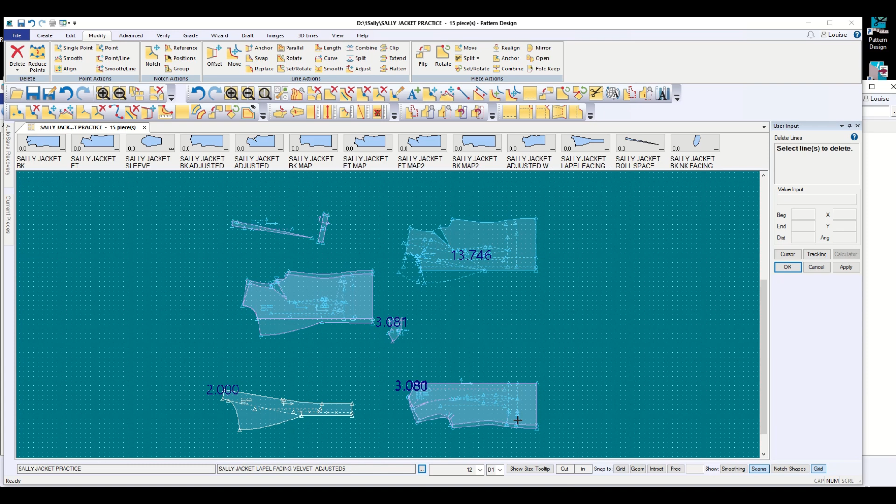Okay, so these are the pieces I'm mostly working with. I've got some of my extras, and I have lined up my back so that they're sitting on top of each other. I don't remember changing the shape of the side seam like that. But it looks like the mistake is in the piece underneath.

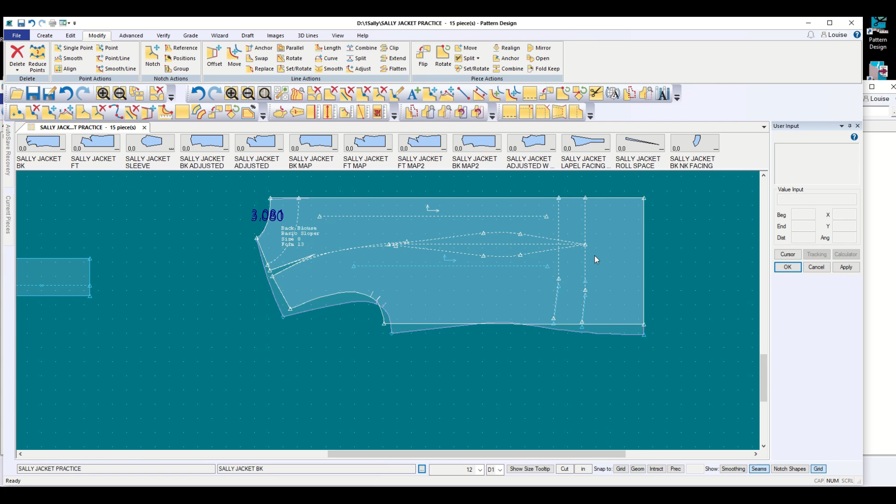So I want to copy the original shoulder shape right here onto my piece. So I've carefully lined it up so that it matches the way that it was sitting when it was first done. And I'm just going to copy this part of the line because when I'm making my lining I don't want to include the shoulder pad.

So create line copy, control, and I want this line. I also want the dart and the shoulder, and I want to put that on that piece and then say cancel, and it's there. So now when I move that, I've got the reference line for my original shoulder. And it isn't lining up quite exactly because of the ease that I've got and the redistribution of the three parts of the dart.

And then on the front, I'm going to do the same thing. Create line copy, this shoulder, put it on that piece, say OK, and I obviously didn't get it. Create line copy, this is the line, choose the piece that I want to have it. I guess I need to hold down the control key anyway. Okay. And there's the line and cancel. And I can move that piece out of the way.

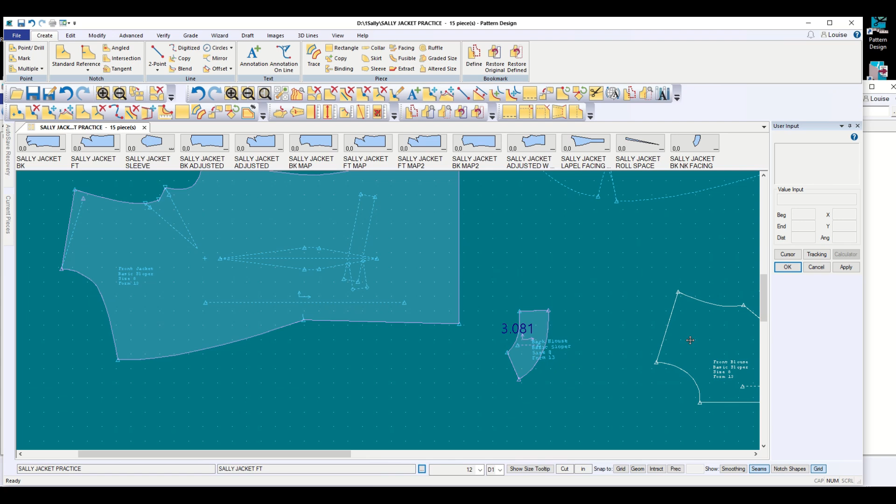So now I am just looking at my adjusted back, my back neck facing that came from the original. I've got my new front facing, and I've still got my map to work with and those two to refer to if I need to, because we still need to make our collar. But this one is about linings, so

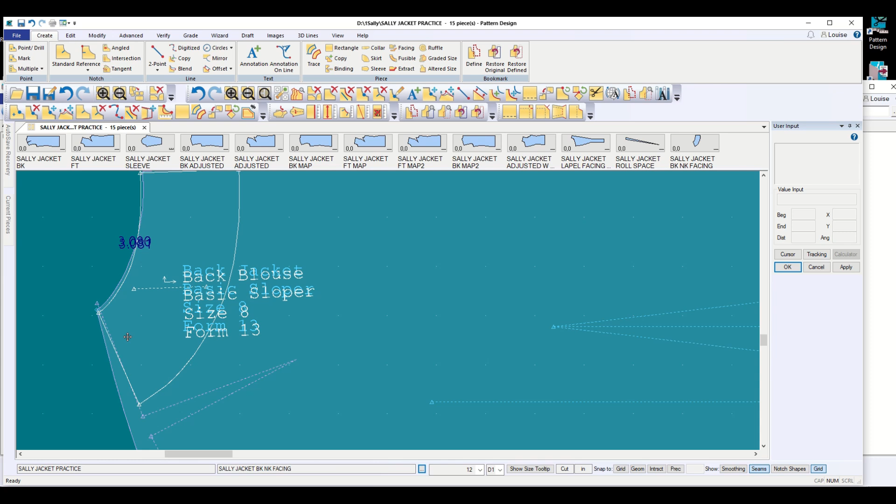I'm going to zoom in really tight and make sure that these two are on top of each other. If I got rid of that grade rule on the one underneath, it would be easier to make sure they were the same, but I'm pretty confident about that. Okay. So I've widened the shoulder area. I need to use my same piece, but I don't need the extra ease in the shoulder. And because of the way I'm going to make my lining, I'm going to put my dart in the curve.

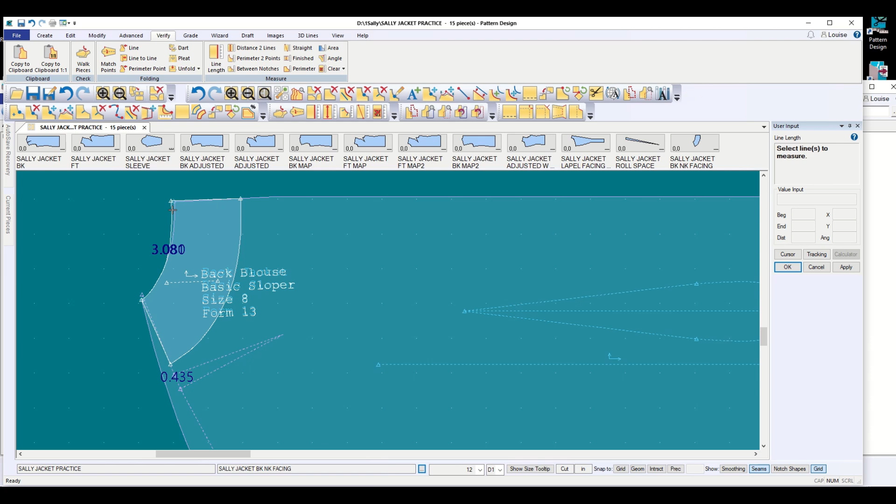So I need to measure the space of that dart and verify line length, this 0.435. And I'm going to go to my original back shape and my original shoulder shape. And when I make my back lining, I also want to have an extra inch added to it, tapered to nothing. So that's going to look something like this, where I just add this space and I come out here an extra inch, but I'm going to be more careful than that.

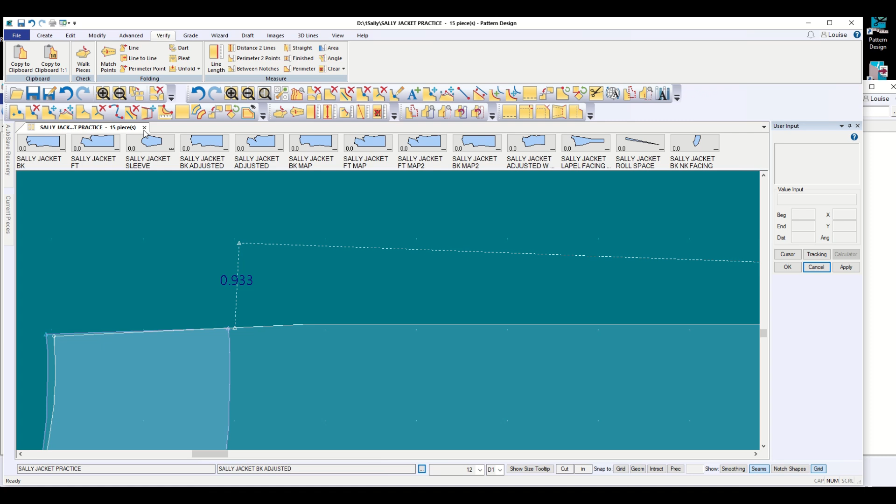And then this line is going to come clear out here, and we'll put a pleat down the center back that attaches to the facing. And I actually could be that relaxed about it. How big is that line? Verify. It's slightly less than an inch, so I would want to make it an actual inch. But that's where we're going. Okay.

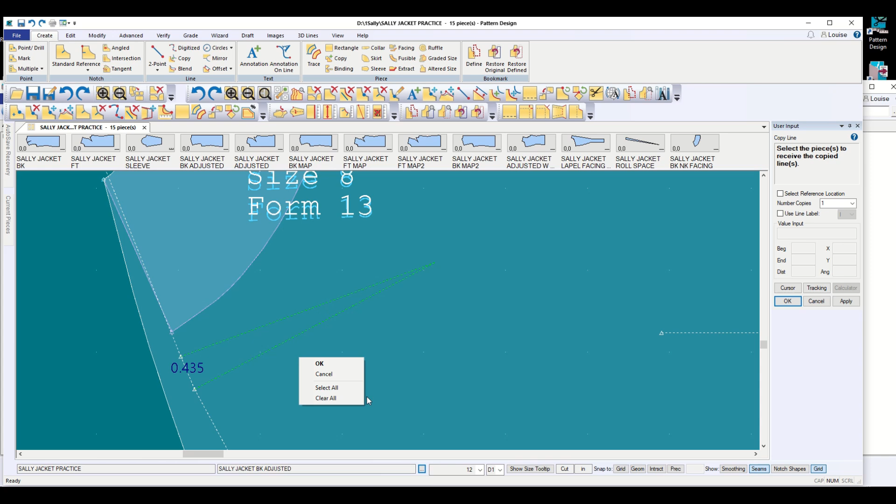So I'm tracing off all of this. I'm using my original shoulder line, but I want to move my dart over. So I'm going to copy this line. And it says to select the piece to receive the line, and I've made a mess of it. Create line copy again. Select the piece that's getting it. Well, wow. I guess I could just put it on itself, because I really just want to line it up exactly right there. But it disappeared.

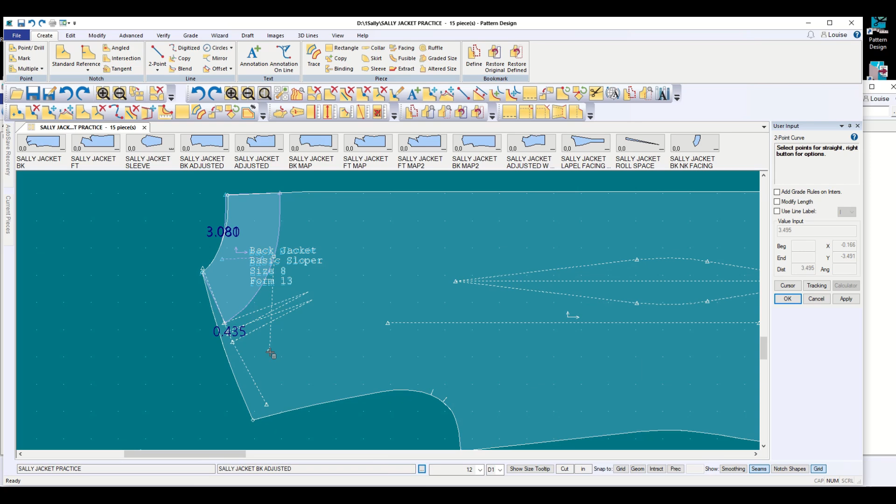Let me make sure that I actually got the right end. Yeah, that's very close. I might need to blend it a little bit. It might end up having a little bit of ease in there, but we're adding that inch out this direction, so that's going to be okay. And I'm going to create a 2-point line right here, and I'm going to make it horizontal.

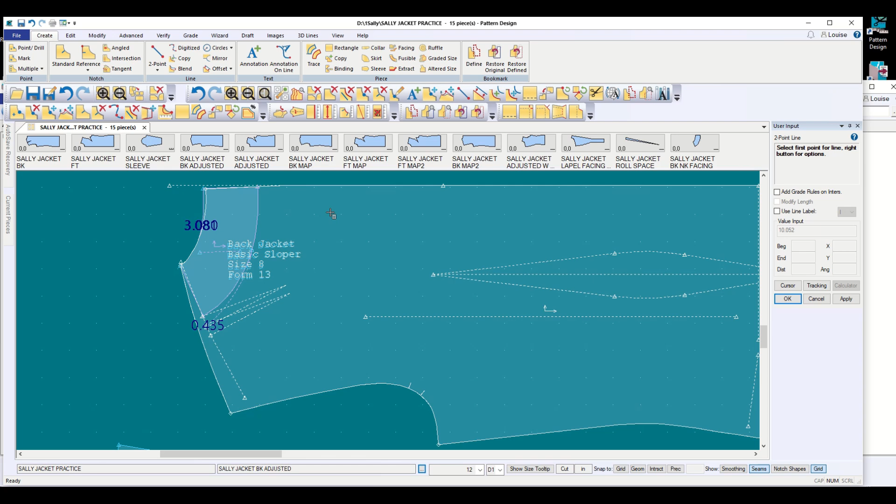And then I'm going to offset that line so that I know I get my inch. Create line offset. There are other ways to do this. I know I do some strange things, but I also do some good things. Okay, so I've got that line, and I want to use that part of it, and I want to extend this line.

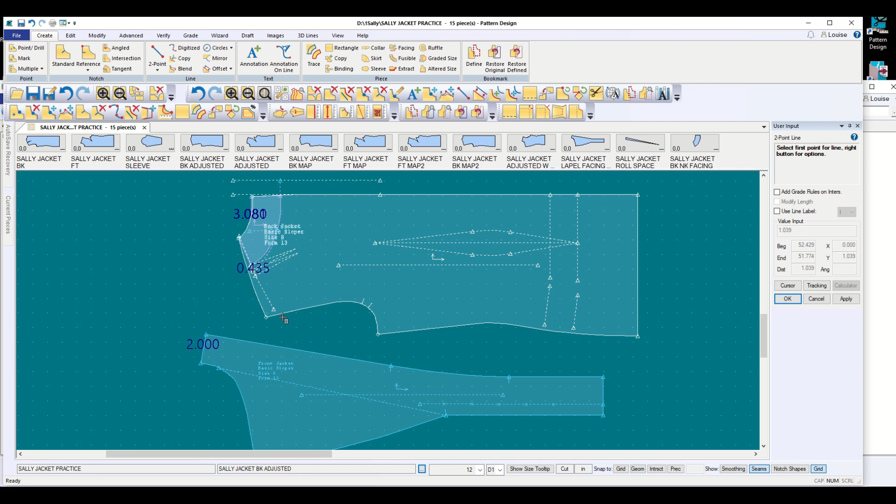I'm going to make a 2-point line that joins this one, that moves vertically just right there. So that gives me the information I need to trace off this piece. And that's going to disappear. And do I want to extend that line out? Sometimes you want to extend them out, but sometimes if you continue on that trajectory, they get too big.

So I'm going to extend this down and make a new line. So 2-point vertical, end it right here, and then I'm going to create a straight line that goes from here to here, because I'm connecting with the end of that and I'm coming straight out here,

and that's the line I'm going to end up using because this is going to sew to that, and it will be minus the dart, and that dart's going to be controlled anyway, and it's going to be on the inside, so the dart is there. It's just more of a princess line than the other line.

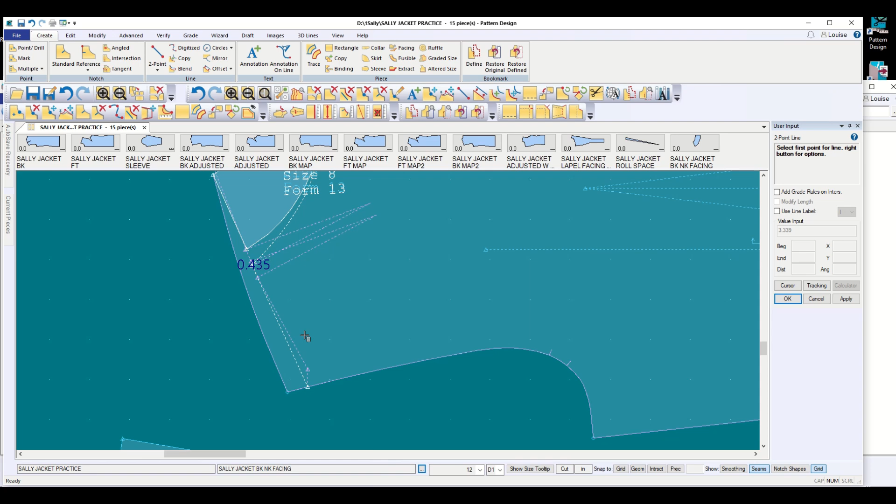And if you don't end up doing this identical to the way I do, I just want you to remember the concept. And on your jackets, maybe you're going to use a princess line instead, but we've studied that. I'm just going over how to make a lining and where to put things. So from here, now I need another new line. And if I haven't explained it well enough, you'll see it at the end. So maybe you just want to watch until I get to the end.

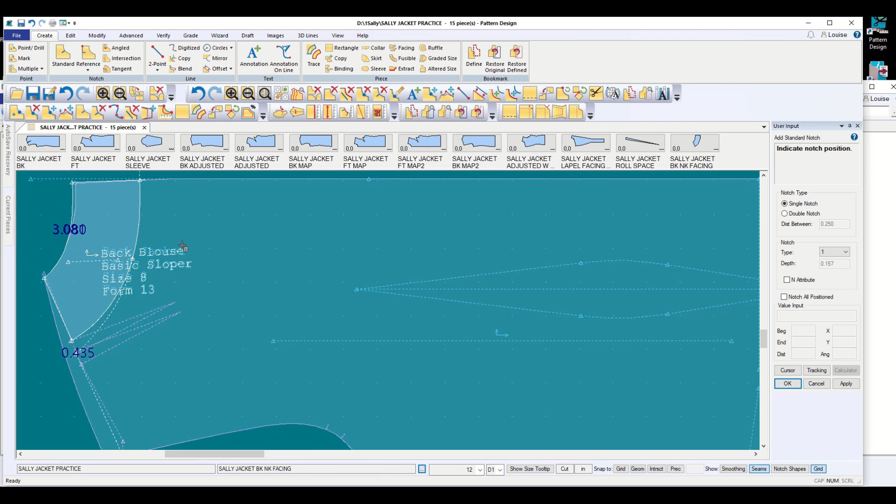Okay, so we have our back neck facing, that's a control piece. Our back neck facing is going to sew to our lining piece. Our lining piece needs to have a notch right here, so I'm going to put a notch on the end of that line right here. And then I'm going to trace off my back lining. Create piece trace, control this line, this curved line, till it joins this line, and then this line.

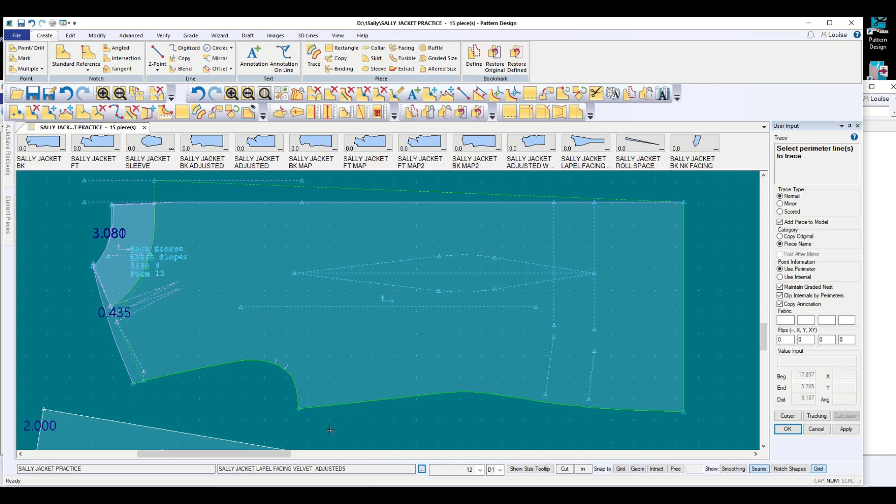Okay, and then do I want my darts? I don't know that I do, but I'm going to copy them. And you know, really, I'm going to want them on the straight of grain, so maybe copying them isn't the right approach. Okay, so that combined with the facing is my back lining, and I'm going to call that my jacket lining adjusted.

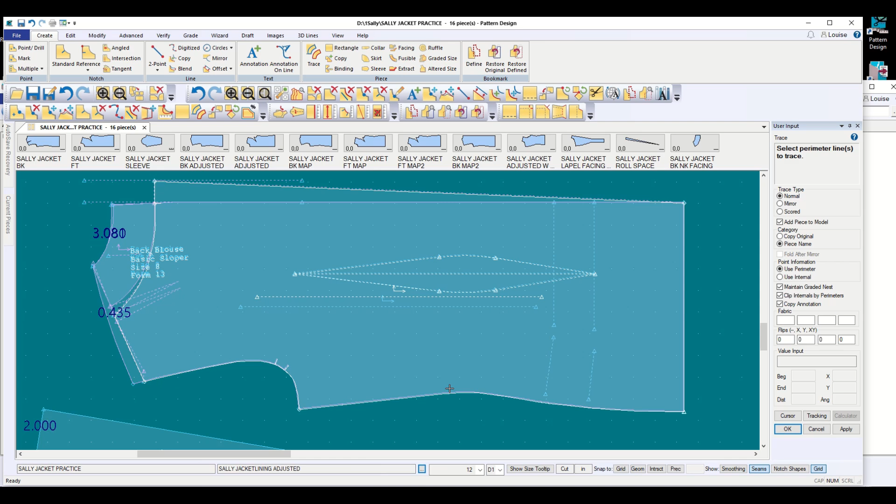Okay, so this was just my helper lines. I don't need those attached to my facing anymore, but I'll leave them there for a minute. So this is my actual back body that's going to be the wool that matches, and it's got the dart in the right place. If I'm going to add a dart to it, I could make it boxier by leaving the dart out. If I did that, I'd want to leave the dart out of my lining. So you've got a lot of design choices to make in addition to the choices I just made.

But what you're going to do first with this is this one is going to be cut on the fold. So we'll want to rotate this group of lines so that it's parallel to that, so that if we were to sew a dart in, it wouldn't be crooked.

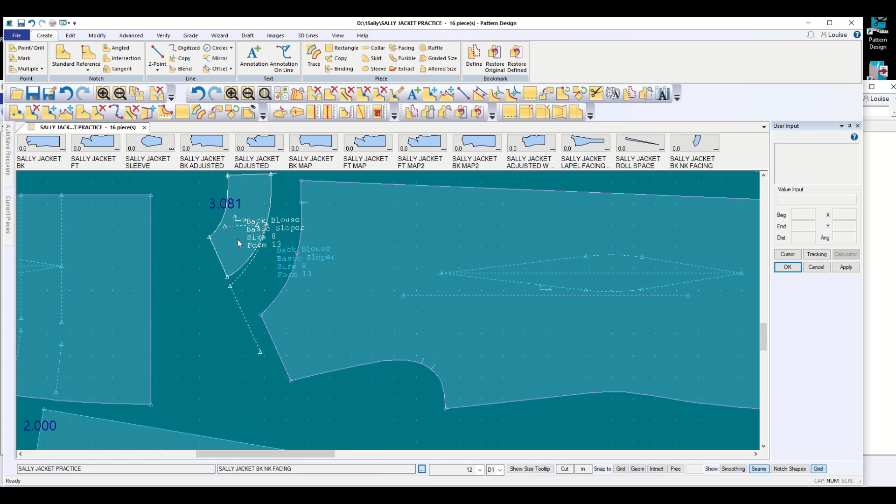And then when the lining pieces are sewn to each other in the shoulder, and the body pieces are sewn to each other, and the facing pieces are sewn to each other, so you'll have this piece sewn to this piece in the shoulder, and you'll have the front lining that we haven't done yet sewn in the shoulder. So the lining pieces will end up being sewn to the facing pieces by stitching them up around the neck and back down, all in one shot.

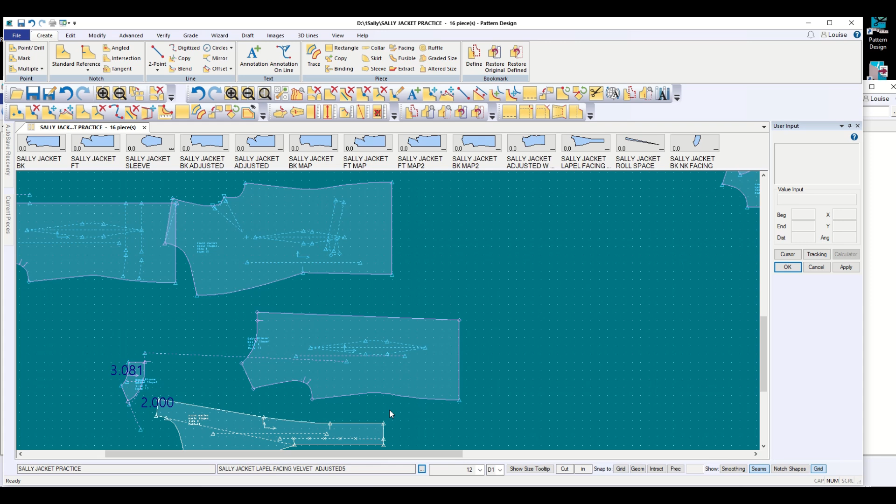And if you make it that way, if you want to make a zip out lining, that makes it a lot easier to convert it to that. And there's a sample in the classroom, or you can just imagine a zip out lining. But this is going to be on the fold, and then you'll put a tuck right here, and when that sews together minus the tuck, how close is that going to be to what we need it to be?

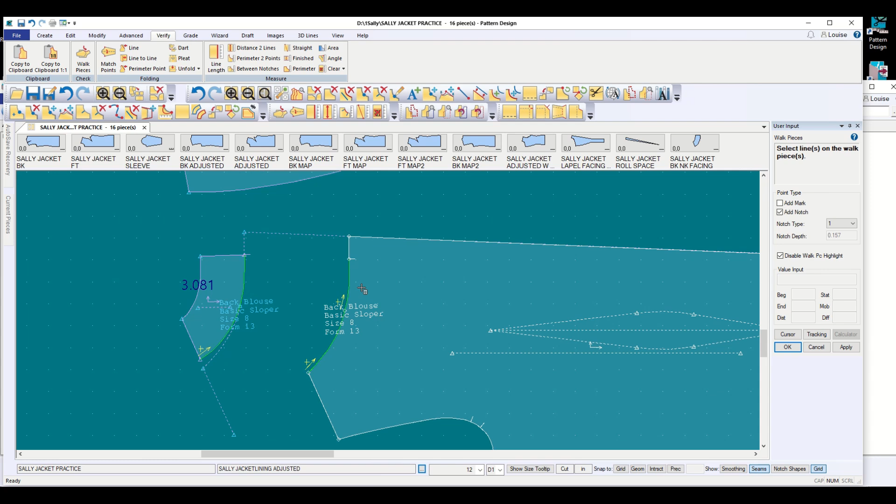Verify walk pieces. The stationary piece is this one, and I want to switch direction, and I wasn't holding the control key, so of course. Walk pieces. Select lines on the stationary piece. This one, change direction. Release the control key. Select the line on the walk piece. Hold the control key and choose the line, and I don't need to get the last one because it's not going into that line.

And so that means I need to ease in how much in that space, which I probably should because it would make it fit better. So I'm going to leave that alone, but I'm going to measure it because I'm curious. Create line.

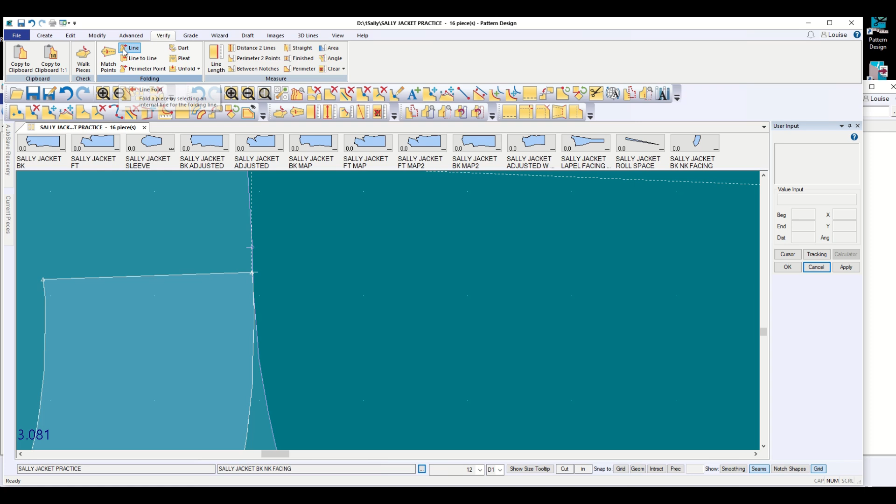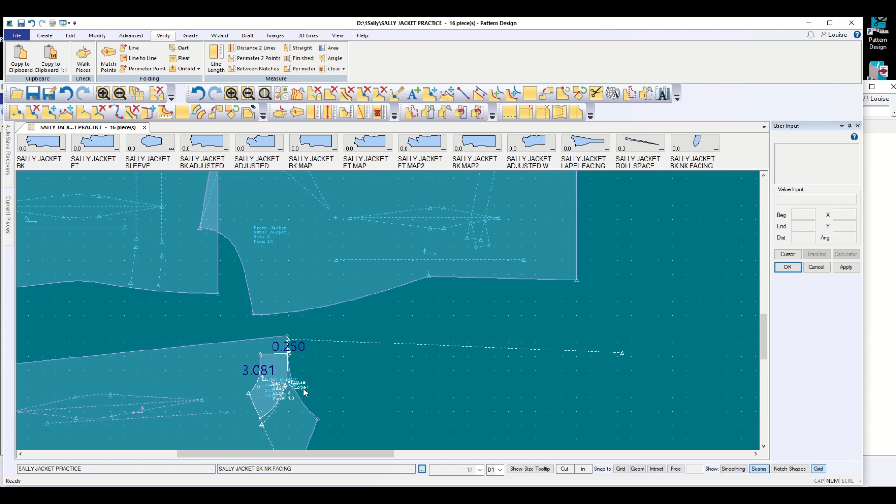That's 1/4 of an inch, which is what it looks like. And I believe that we can ease that 1/4 of an inch there. The problem is when you get a sewer that thinks they know what they're doing and the pattern maker has built ease into there on purpose. So we'll ease the lining into the neck facing, and then we'll have this extra tuck back here that will just fold over into a pleat that goes down the center back, and you'll see that in the sample, and most coats have that.

So that means I'm not going to change the start, but well, okay, I'll change it. First, let's create a rectangle. And I'm feeling bad because I don't think I've made it clear enough before I started what we're doing, and here we are doing it. Modify, set, rotate.

So even though that's going to be a little weird on the piece, it's necessary because it's going to be cut on the fold. So now we need to realign the grain so that it's parallel to the center back. So now that's where it needs to be. And we can either leave the dart where it is at the bottom or leave the dart where it is at the top. I'm going to leave it where it is at the bottom because it's the back.

So I'm going to modify, line rotate, and I'm going to hold down the control key, and I'm going to choose all of those lines so they function as a unit, and then release. And then it says to select a point on the line to rotate around and a point to guide the movement. So I'm going to move them all so they're parallel, and I've got them lined up on the dots. So if I wanted to, I could arrange it so that it's right on the dots.

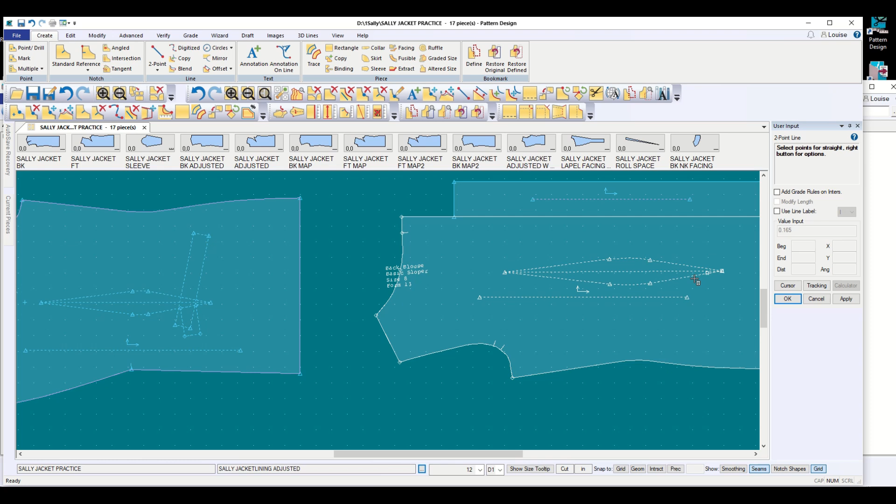Or better still, I could create a 2-point line and start down here and horizontal. So I'm not quite perfect with that, but if I had done that before I started, then I could have rotated this precisely to that line, and then I would have had it right on grain and made it easy to sew as a dart. So I'm going to save that piece.

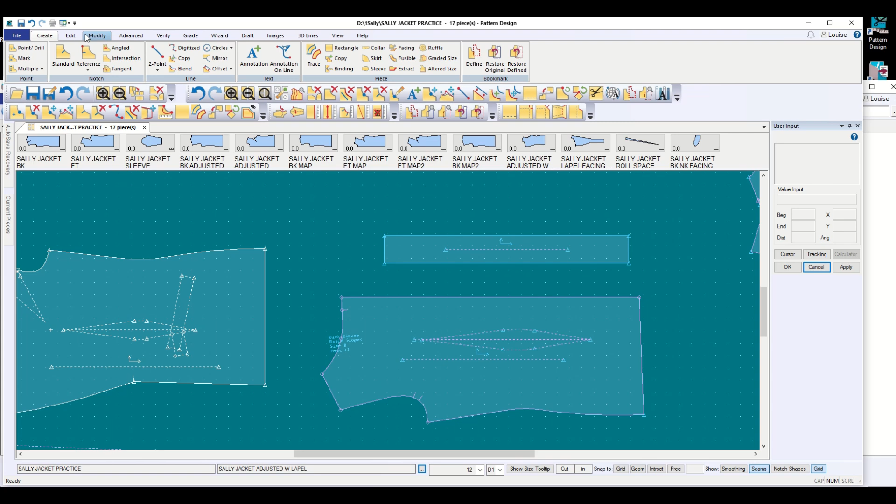And I've got this one the way I want it now, so I don't need those helper lines on it. And I think that I haven't changed it actually, so I don't need to do anything with it. It's just already there. So we have our front and our back lining and our back and our back neck facing. So I'm not going to save that. It would be safer if I deleted it. And I want to get rid of all those numbers, so verify clear.

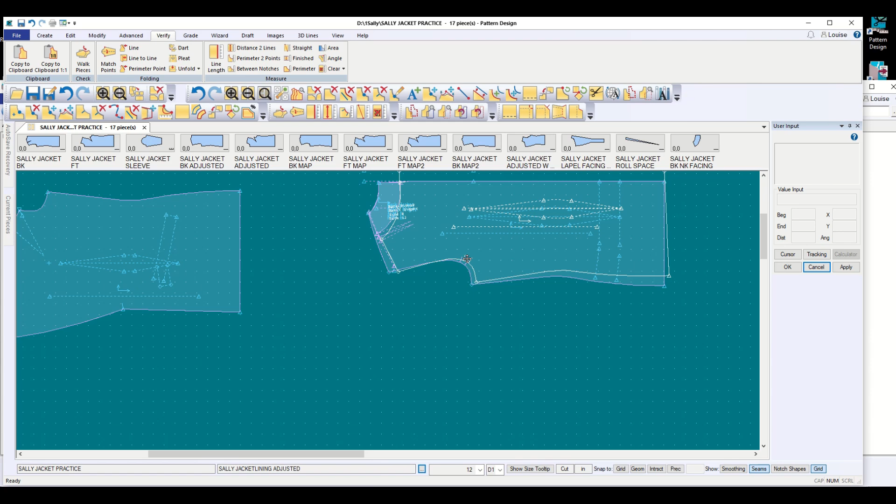So my back neck facing and my back lining, they're crooked because they're not on the same grain anymore. And where did I put my front neck facing? Well, I've got another one, so I'll bring that one down. Oh, there it is. Wow, here's where I want to put all of my pieces. I could separate them all. Don't really want to do that. I'm going to zoom in to right here. Oh, I'm going to touch those two corners. And if I had done it in the right order, that would have been great. So we'll try that again.

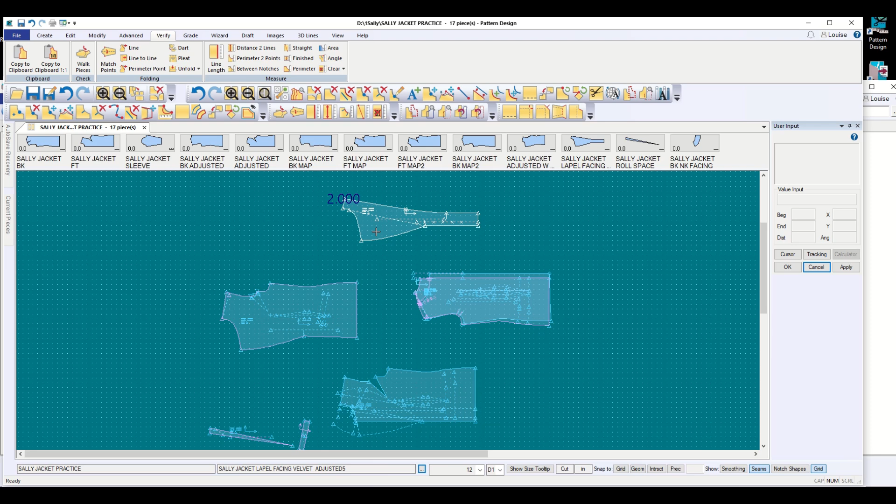I want on the screen, I'm going to choose the zoom tool and outline the ones I want to see. And those are the ones I want to see. So I've got my back body, my back lining, and my back facing, and I've got my front body, and I need a front lining, and I'm going to compare my front facing to my back facing. Modify piece flip around that line, and if I line those up, they should come together.

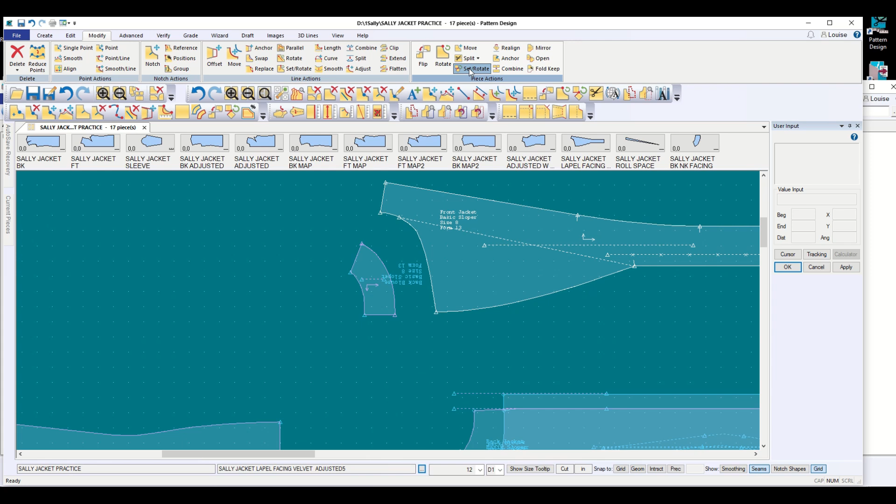They were never on the same shoulder. The front and back shoulder weren't aligned perfectly. So, when I cleared the measurements, this wasn't on the screen, so I imagine that has something to do with it. Verify clear. Okay. Modify, set, rotate. I'm lining up my back neck facing on my front neck facing to make sure it matches.

And there it is. So they line up correctly, and if I flip around that line, modify piece flip, flip about line and I choose that one, they have a nice smooth line that when the shoulder seams are sewn together on both sides, then we're going to create the front lining to sew up to that neatly, and the back lining will sew over there, and then we can make our collar. And I think I'm going to do the sleeve linings at the same time that I do the sleeve. Okay.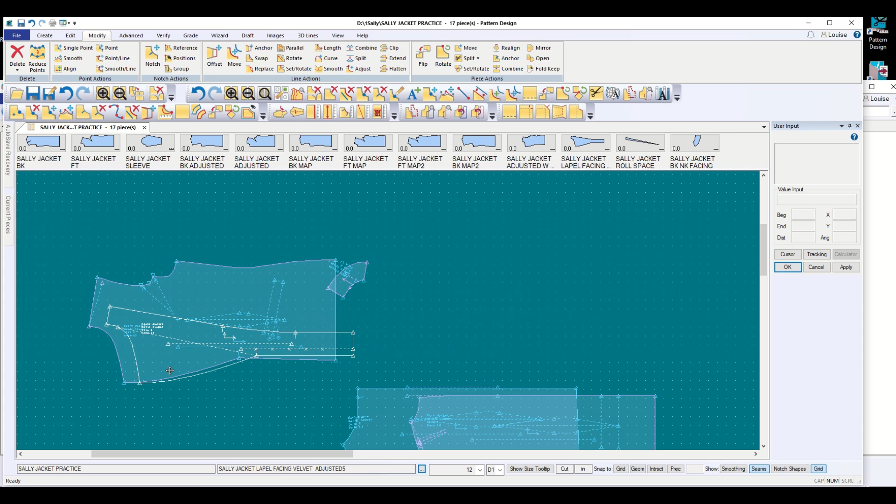Well, I made it difficult on myself, didn't I? Because if I had made my lining when all of these pieces were lined up exactly where they go, I wouldn't have to put them back where they belong. Okay, so I'm going to line that up until one disappears, whoops, inside the other. Okay, so they are supposed to align right there, and they appear to be aligning right here.

So I'm going to copy this line onto my front, create line copy, select this line, control, all three of those lines. I need to combine them into one. Okay. I did that again. I keep saying okay. Create line copy, control key, choose the lines, release, select the piece to receive the lines, cancel, and cancel again.

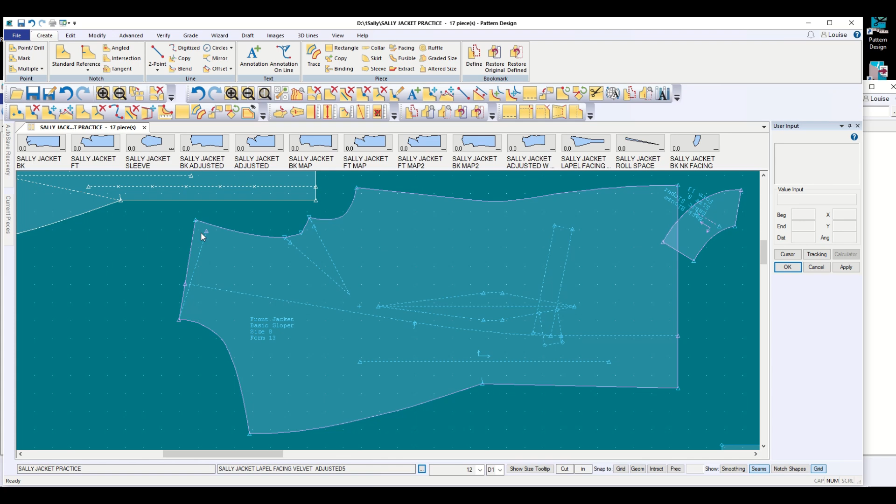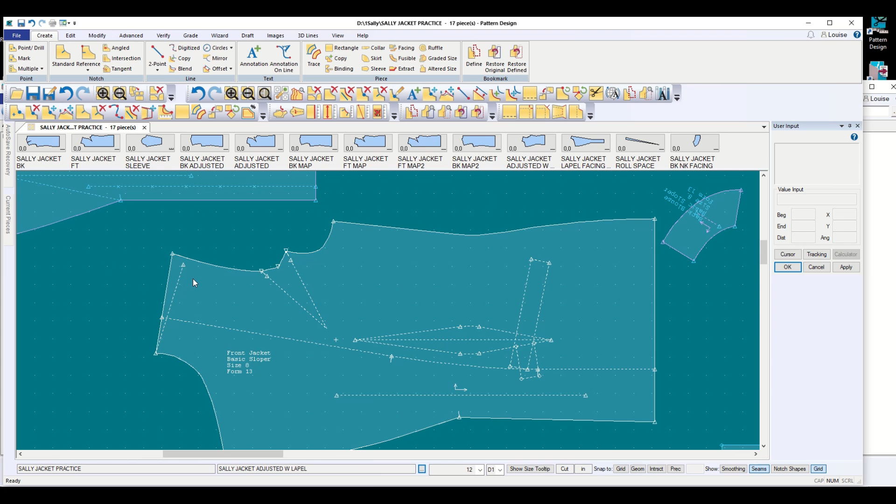Okay, so I can now trace off my lining piece over here. And I need to keep this dart. This one I don't necessarily have to keep. But if I do the same thing I did on the other one, instead of following the trajectory, I move this straight out and draw a different line. I don't know which one would be the right answer. It depends on what I did and how I did it. So I think based on what I did over here, I want to come over here straight.

So 2-point line, right click, vertical, zoom in, connect with that line. And then I won't get this big huge amount right here. So I'm going to draw a new line from here to here, which is where I want it to be. And then I'm going to delete the other line. And I think that's more correct. But that's something you have to figure out based on what you're doing.

We're getting into a lot more complicated, and I'm not just simplifying it for you. Let me know if you want me to just simplify it for you, and I won't add things like roll ease or anything. I'll just do the simple one that won't fit as well. Okay, so I'll start simple and then I'll get more difficult with this one. Create piece trace, hold the control key. I want this line. Uh-oh.

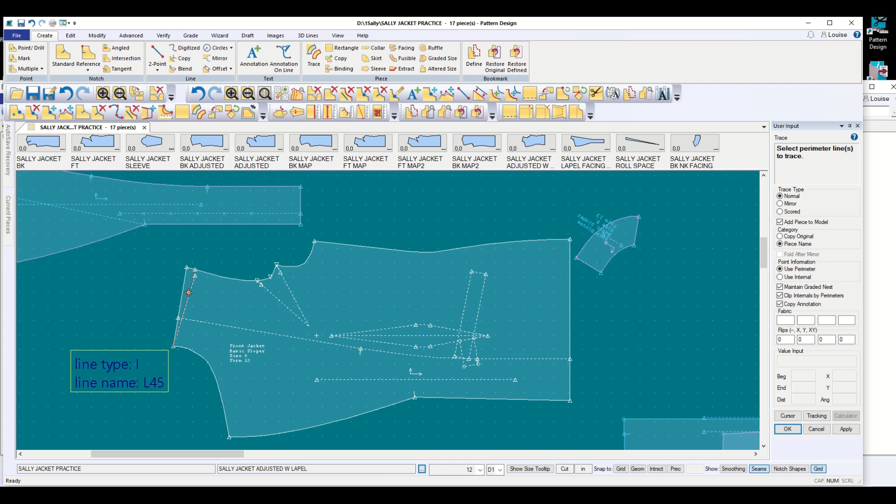Well, my facing is going underneath and my body is on top. So it makes sense that I want this little corner of my facing cut off when I trace this off, because it's underneath the shoulder pad. So I'm going to keep going. But that means we'll have to come back and double check the shoulder because that's changing it a little bit.

When I made the shoulder facing, all right, I'll finish the thought and then release and hold down the control key, and I want all of these lines on my lining. And release. Okay, so there's my simple version of my lining, and it sews to my facing. And this is my adjusted front lining. Okay. Cancel.

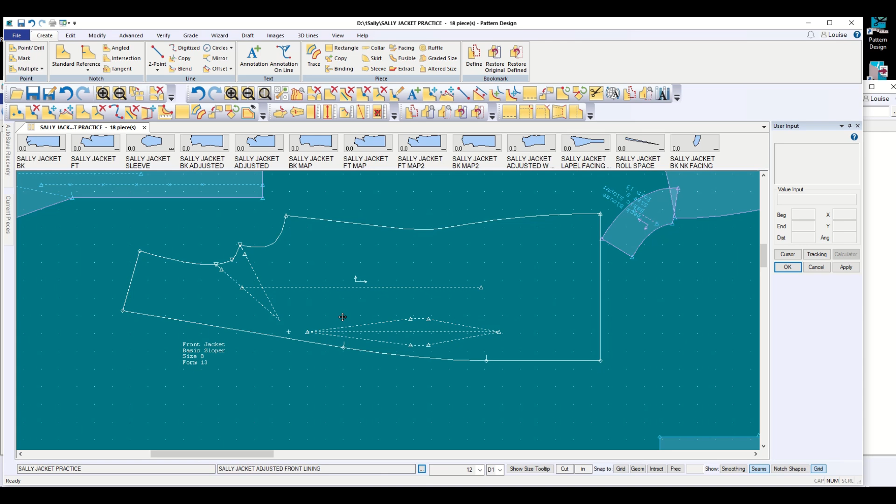So what we've got right now, when I made this back neck facing, I went back to the original to make it, and I didn't do that when I made this piece. So it makes sense to me that this piece probably did need that little adjustment. So right here, the neckline is the same, but if this is going to sit underneath that shoulder pad, this does not need that extra shoulder pad ease. So I'm going to line that up exactly on top.

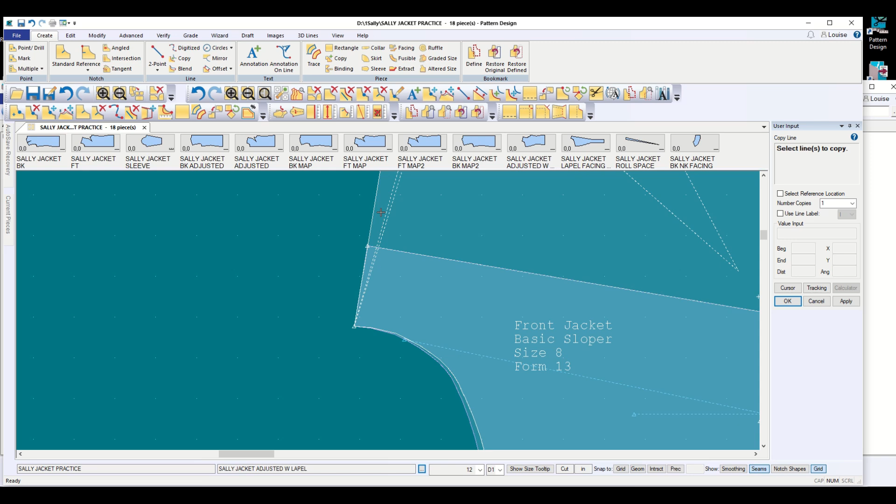And then I'm going to copy this line onto this piece because I'm probably going to chop that off. But that means I'm going to lose my right angle, and I'll have to make some adjustments to the facing with the back neck facing. Create line copy. I'm copying this line. I'm putting it on this piece, and I'll cancel so it stays where it is. And we'll take it from there. So this little bit probably needs to be cut off for the same reason that I started from my original back shoulder when I made my back neck facing.

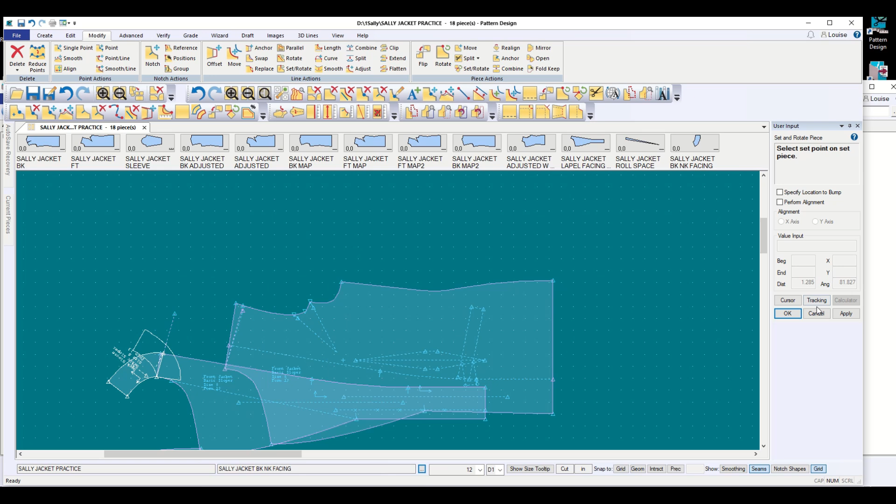So how well do these line up if I line it up on that line? Modify, set, rotate on to this line with this line. Cancel. Well, I lucked out. That looks fine. So I can just swap that. So if you've always wondered how you know how to make the lining smaller than the body, you don't add shoulder pad ease to the lining. Okay.

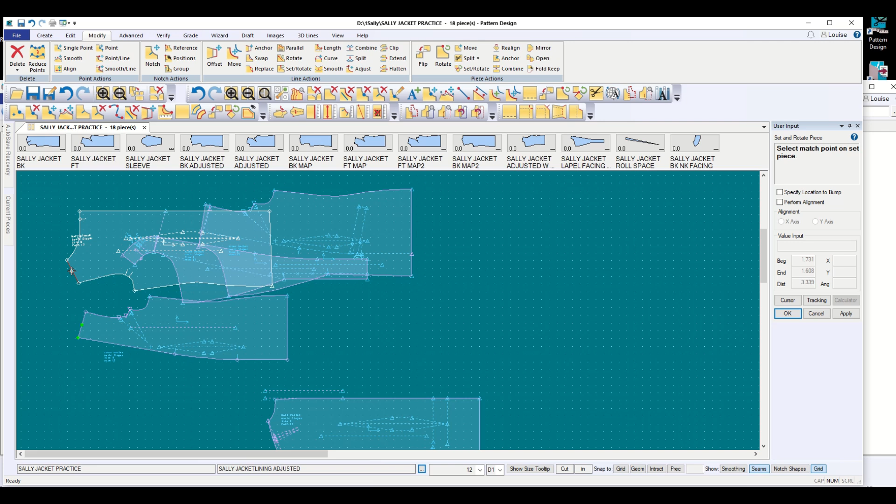And where's our back lining? So I'm going to flip that over and join it. Modify, set, rotate. So this is joining here, and this is joining here. Cancel. Oh. So we have a little discrepancy here. So it makes us wonder what I did. Because we deliberately left that there, and if I backtrack, maybe I should have it here, but I don't want to add that extra ease back that I took out where I put the dart in there, but the shoulder was a little too wide.

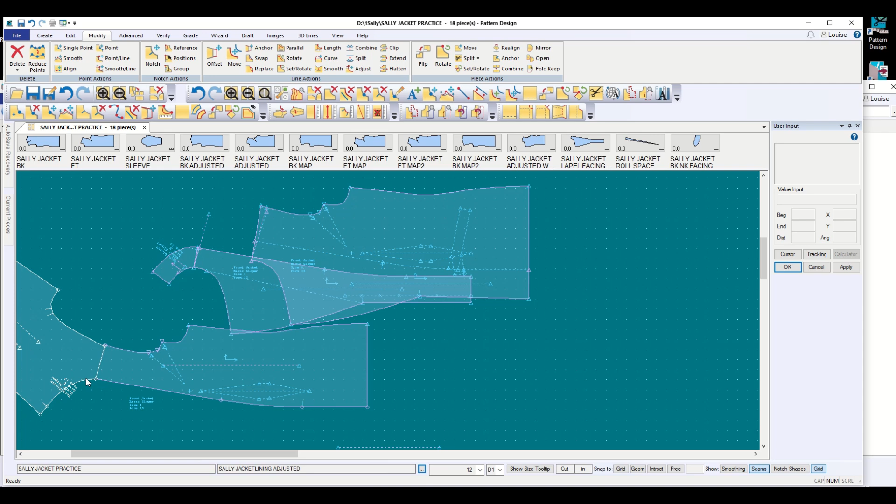No, it was this length that was a little too wide, so that's concerning. I need to backtrack and figure out what I did, but you don't have to listen to that. So this is going to sew right there, and this is going to sew right there. And you'll just stitch all the way up right here and combine them together. And I'll be more careful about that. So it's lining up on that inside line.

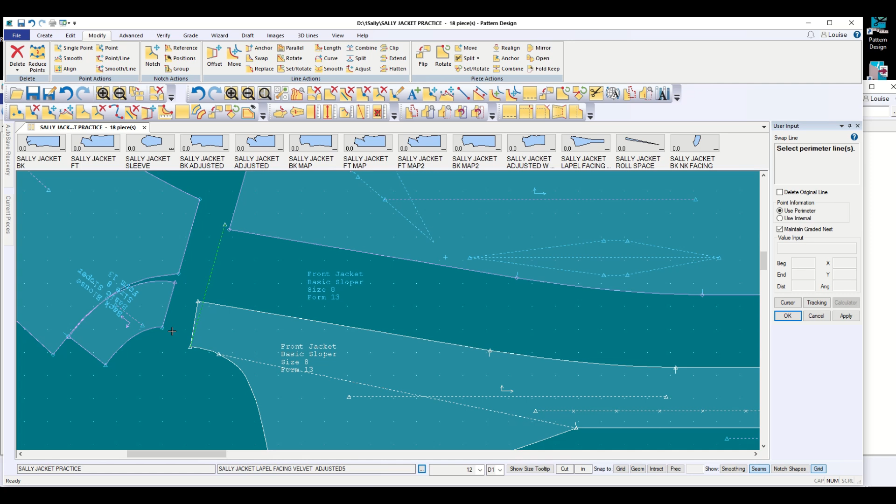And then this piece, yeah, I'm not really liking that. But so I need to swap those two. Modify line swap. So those come together nicely now. And those come together nicely with it. So we just need to set rotate this one.

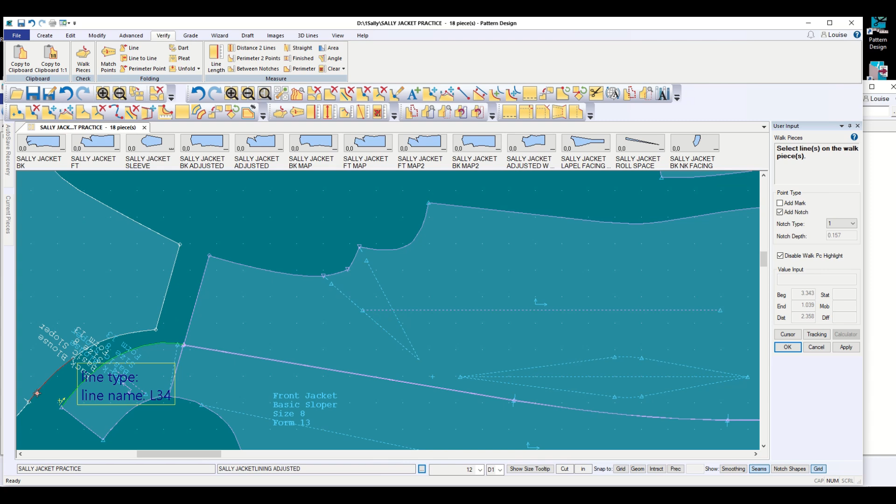Well, what did I do? Verify, walk. From here and here. Well, I didn't hold down the control key, and so I couldn't flip it. Verify walk. Stationary. Release. Control again. Walk piece. Change direction. Come on. I must have touched it.

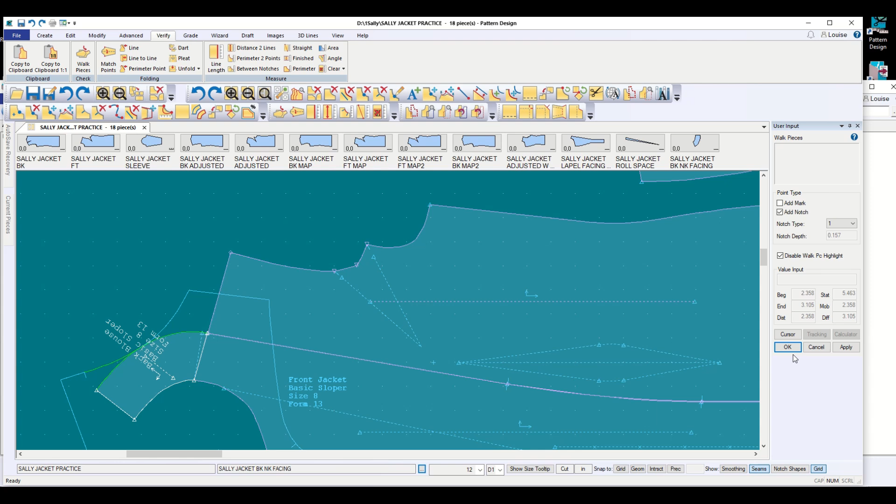What do you suppose disable walk piece highlight means? That hasn't ever been there before. All right. We'll try that one more time. But really what I want to do is walk it along that way, not flipped. But if I do that, then I'm going to end up with this right here, and I'm going to just rotate the piece, because if I ease that in like I want to, it will fit better.

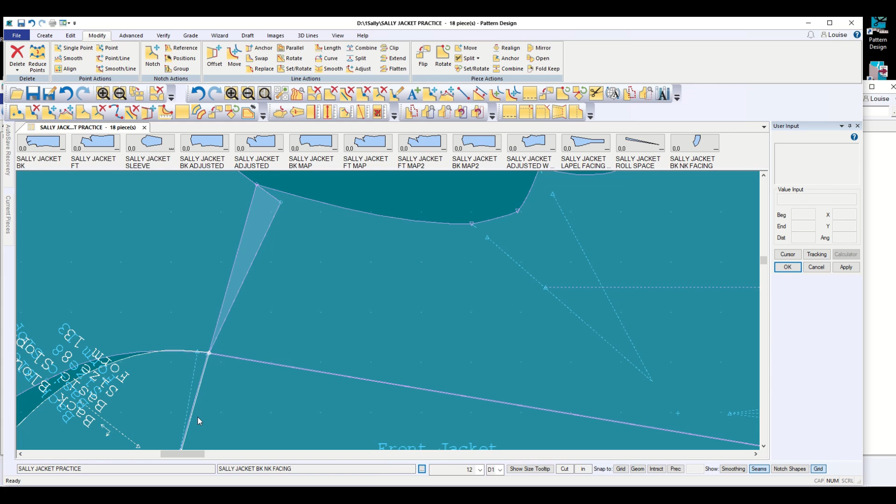So modify piece, rotate, select piece to rotate, the point on the piece to rotate around, choose a reference point. So if I line that up on my back, well, that's not pretty. Those don't come together nice and straight like I want them. So if I was working with that on the table, I would draw a straight line right there and put it back, which is essentially going to add to my back piece what I cut off the front. This is what happens when I'm thinking and talking at the same time.

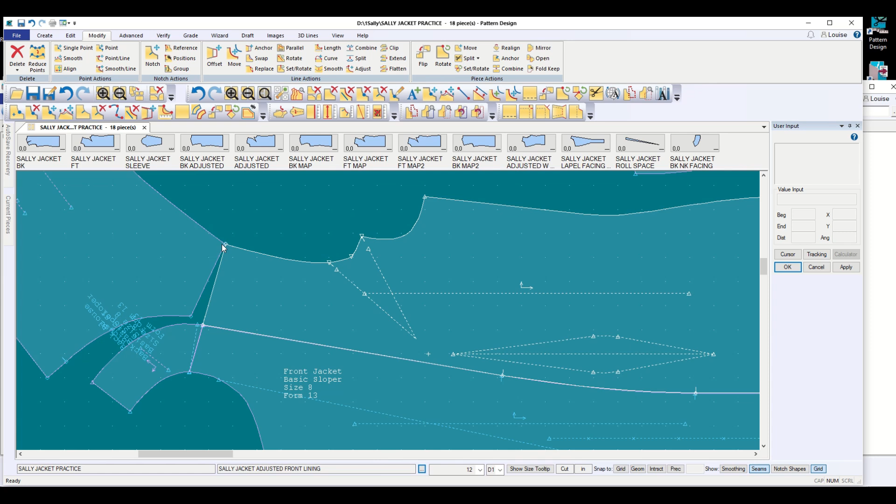Okay, we're going to go back to trying to walk it just for fun. Maybe I don't want to put the dart into that space. Sometimes I wonder if that's a good idea. It's convenient because you don't have to sew an extra dart, but it causes all kinds of problems, and I wonder if there are fit problems too. But it is a way to compensate. Okay. So I think that if I line this up right here, modify, set, rotate. Right now I'm thinking out loud and making all kinds of lovely mistakes.

So right here, where I was trying to put this dart in, I like putting the dart there, and you can actually see, because of the shape of the curve change, we had just less than a half of an inch of dart that I was putting there, and rotating it in and easing it is putting it there. But our shoulder still needs to be the same, and I don't like the way that joins. So I'm going to move that blend, and it's going to kind of be splitting the difference between putting the dart in the shoulder, and it will keep our angles turning out nicely without changing the fit.

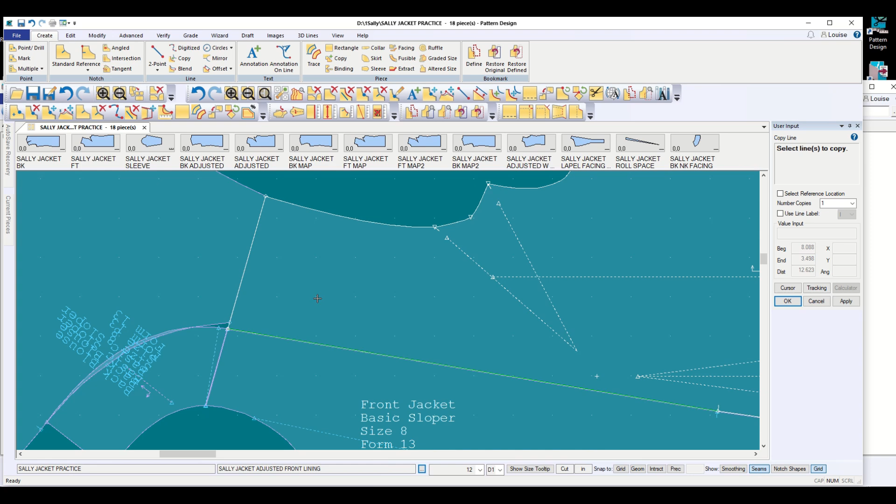So I'm going to create line copy, and I'm going to copy, no, not piece. Okay, create line copy. I only want to copy this line. I have to select the control key, copying that line, and I'm releasing and putting it back down again. I want it to go on that piece, and I want to cancel and say okay. Alright, I realize that I just skipped a whole bunch of steps in my head, and I'm sorry if that lost you, but here we are back again.

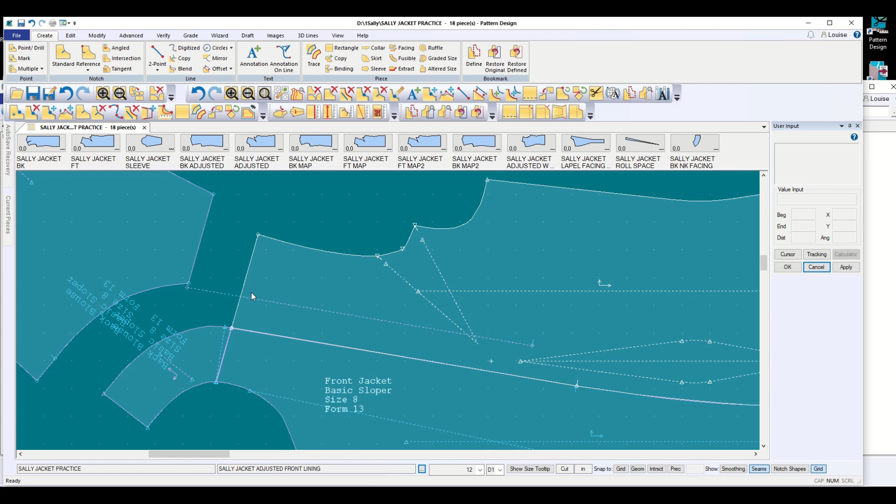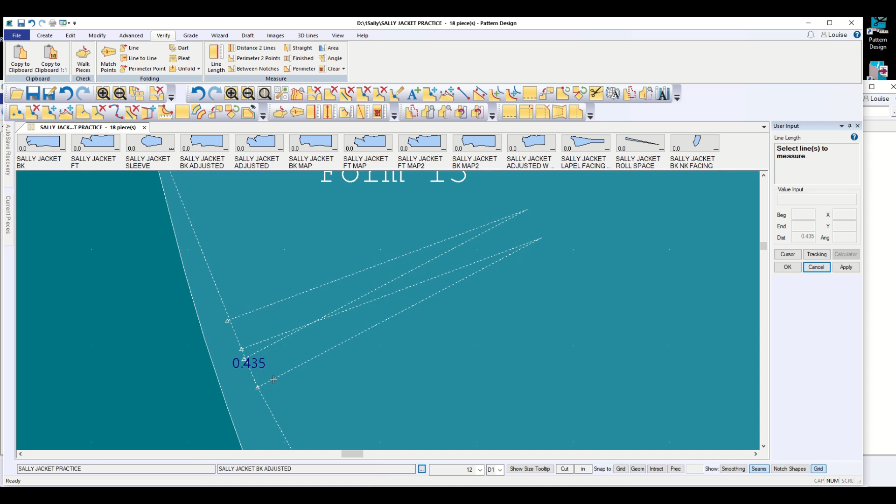I copied this line onto this piece because that's where I need to blend this, because back when I was using this line to draw kind of a yoke line for the two pieces to go together so I didn't have to sew a dart, I put that dart in the yoke. How much space did we have in that? This dart is 0.435. So I'm putting most of that dart in the seam allowance like a princess or a yoke. But it looks like that it's not going to, oh my goodness. Okay, right here. That is just so much easier.

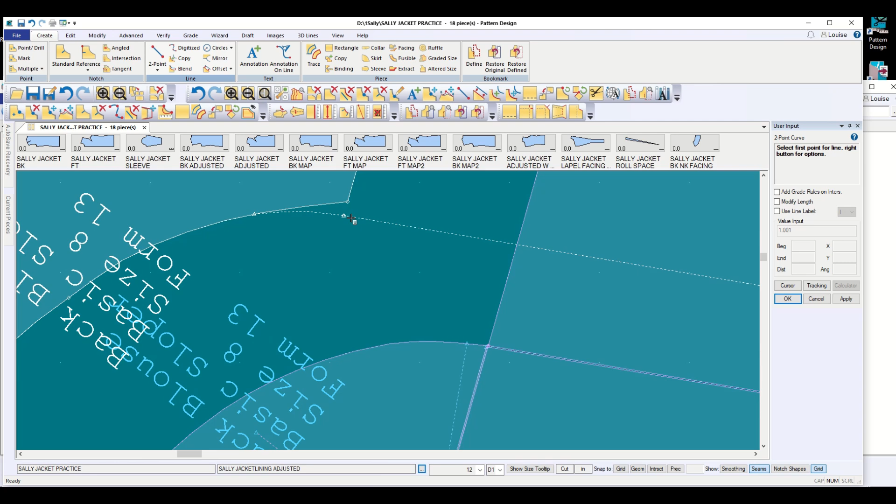Okay. But it looks like that if I put all of it right there, it's going to give me a messy join, and I don't really like it. So I'm going to create a 2-point curve, and I'm just going to barely blend this back into this and put that right there. And if we're curious of that 0.43, whatever it was, how much of it am I putting back? Verify line length, 0.159. So I've got 3/8 of it in a dart, and it matches, so I'm not really easing it. And I'm going to call that good.

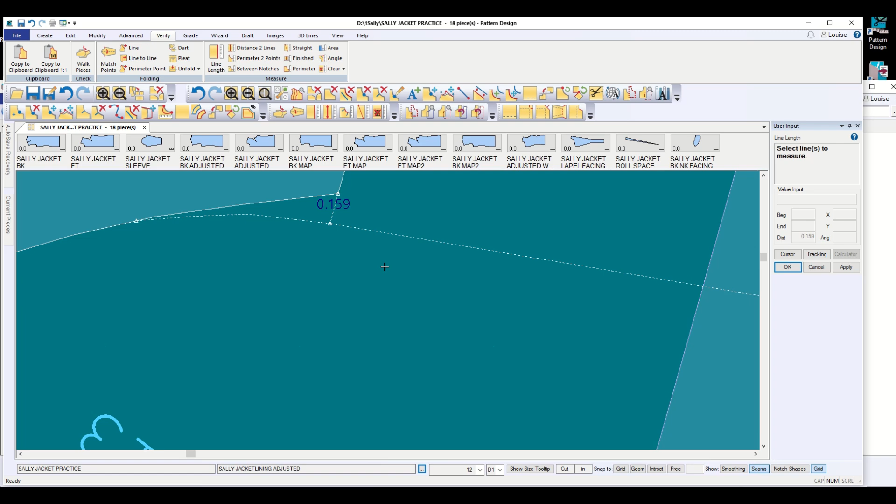So I'm going to split this, modify line split right there, and then I'm going to modify line swap.

I'm going to try doing it with just that one and this one, and it worked. So I'm going to keep that, and that solves my problem in a couple of different directions, and I don't have to go crazy.

So delete line. I don't need this one anymore or that one, and if that didn't make sense, just back up and re-watch it.

But I want to combine those two lines. Modify line, combine, control this line. Oh, there's an extra line under there. So combine this one and this one.

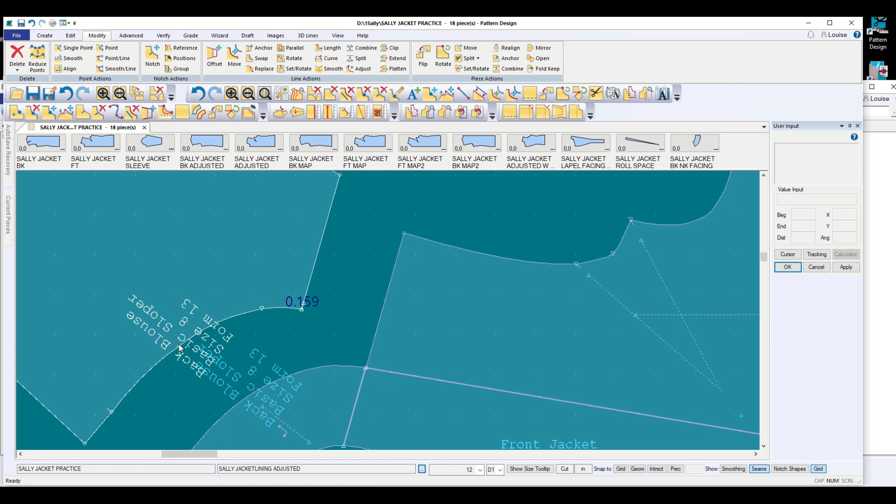And I could combine that one, but I'm not sure I'm ready. And I also want to edit that point and that one. I don't want to delete the whole point, but I do want to delete the grade aspect. And I clearly have a little dotted line under there I want to get rid of.

Okay. So now all those pieces fit together, and I get my dart back because the shape of the curve is different, and I need to ease that in.

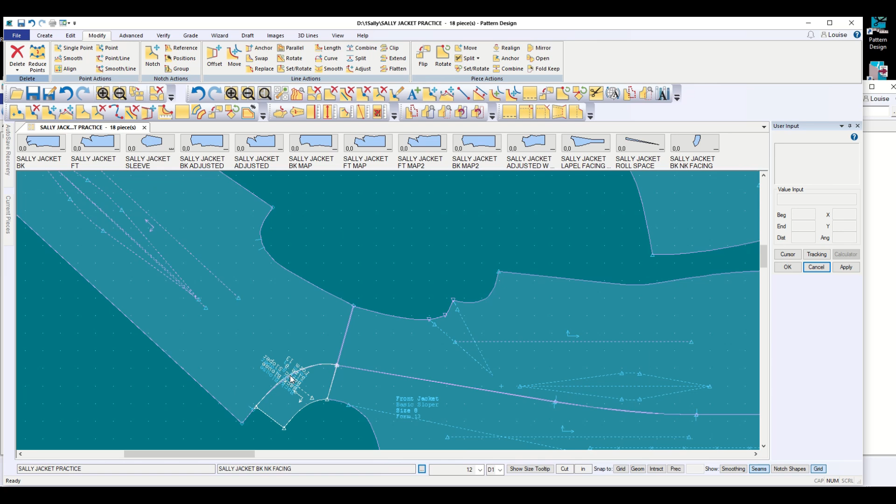And if I really wanted to, I think that's actually fairly okay, but if I really wanted to, depending on how yours turned out, you could blend this line to that one, but that is just such a small amount. I don't think I would do that.

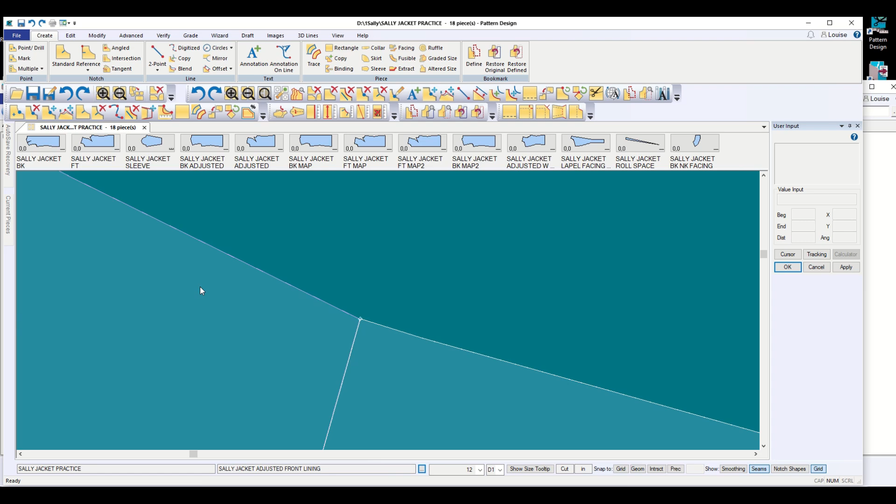So I'm going to undo. So that leaves me with these two are lining pieces and these two are facing pieces. These are both velvet, and that's going to be more comfortable on your back neck than wool or lining anyway.

And you'll put that tuck in. So you'll sew the lining together first on both sides and the tuck, and you'll sew the velvet together on both sides, and then you can either start from the center back on both sides and sew all the way around, or you can start from one side and sew to the other, but you have to be extra careful while you're matching up. And the notches I put there already match.

Okay, that's the simple version. But I wouldn't leave this way if I were putting this in production. I would take at least some of this dart out of here as part of a princess line here on the lining.

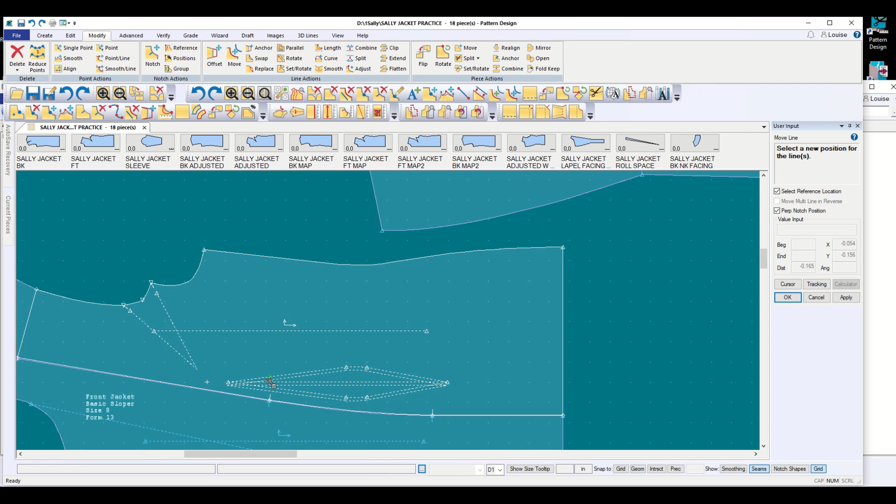So if I modify line move, this one, and I hold down the control key and I select all of these, and I bring it over and I put it right there next to where it belongs. And then I come up to line rotate and I hold down the control key.

And I rotate and release and then touch a point to rotate from. Uh-oh. I chose the one to rotate around and that would have been a mess.

Modify line rotate. Hold down the control key. Choose all the lines. Now, I don't know exactly what I'm going to do.

The point to rotate around is this one, and a point to guide the movement, I'm going to use that one. If I bring that over there, and I leave this amount in as ease,

and I should have rotated that a little further. So I need to zoom in tighter next time. But it looks like I maybe need to move them all over.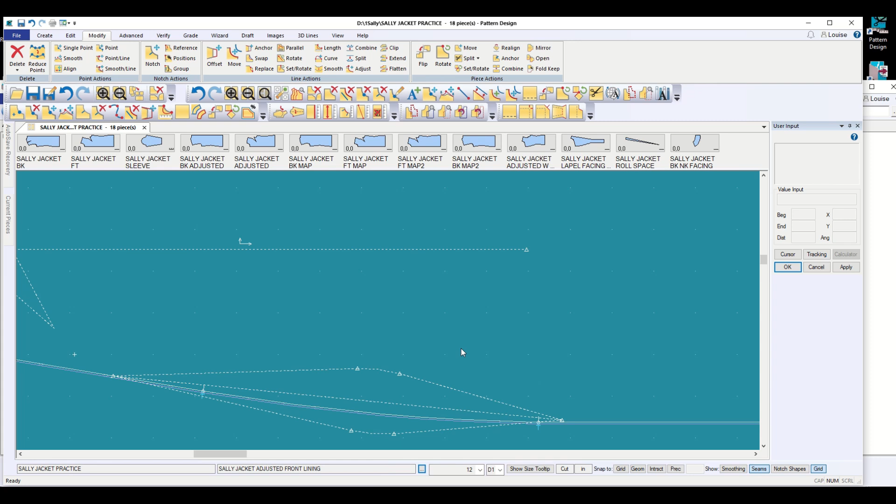Or I can just move that part of the line over. So modify, rotate, control. I'm just going to choose these three. Release,

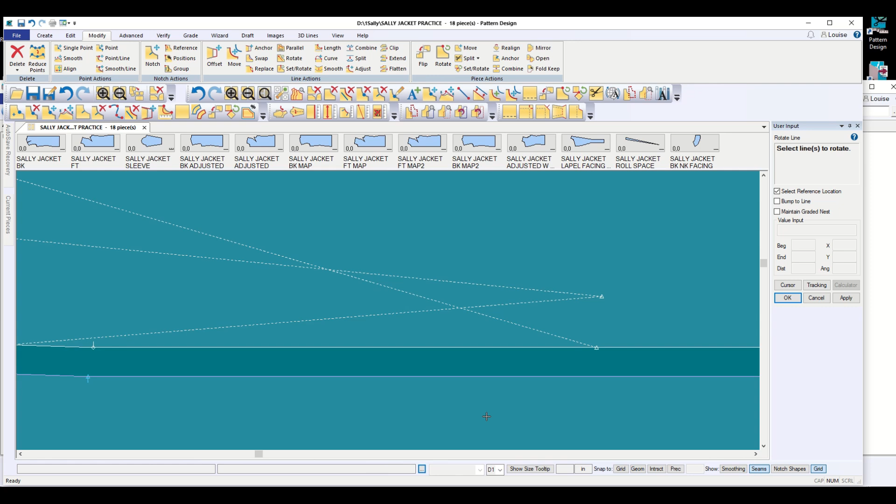rotate around this one, point to guide the movement, and if I zoom in right there, I can set it down right on top. Okay, so this is the lining.

I've left some ease in there. You always want to leave some ease, but instead of trying to sew that dart, I'm actually going to swap.

I'm going to extend that line, modify line adjust, because it's not quite overlapping. And I'm going to do the same thing with the other one just in case.

Alright, and then I'm going to split and swap so that this is a princess line sewing into that one, and my lining is a better fit. Without that, I don't have to do that.

I could leave my dart there. I could leave extra ease in it. But I want a nice, neat princess line right there, and I kind of want to put a pocket in that area. So you could be creative and have fun with a pocket inside your lining.

But modify line split. Right here and right here, and swap, control, clockwise, control,

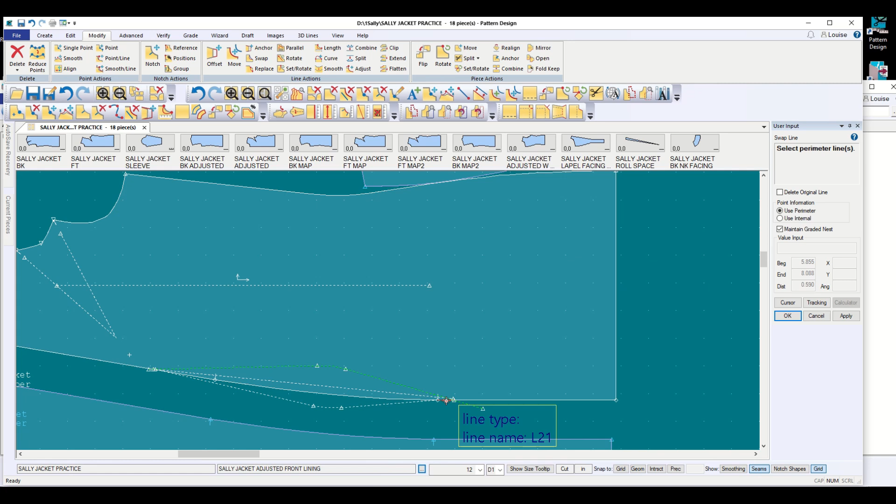so I'd need to blend that so that it was curved nicer, and looking at it, you know, I question whether it's a good idea or not. If I was making this into a, that is an option, but I wouldn't let it be that clunky.

And you now would have to put your darts in, your notches in. I don't know why I always say notch, dart, when I mean notch. Create 2-point curve.

This is the kind of crazy, silly stuff that you sometimes do when you're making it easier for the sewers. So that line would work. But this one is questionable.

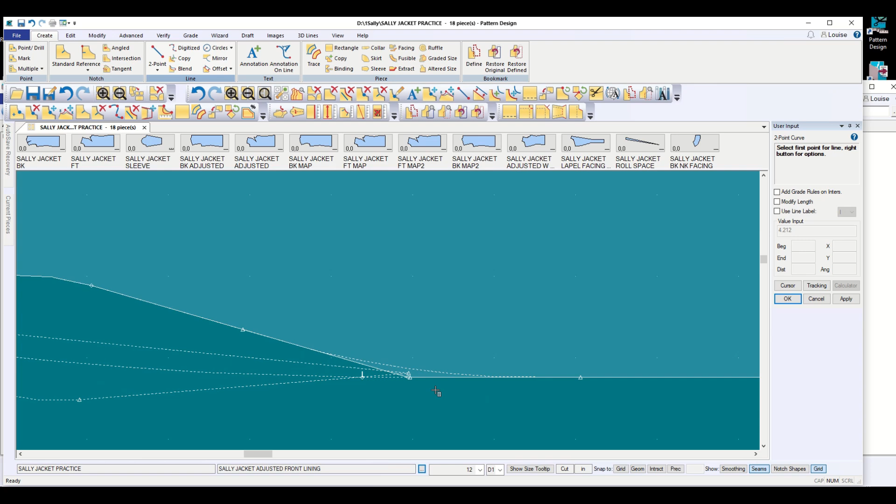So I would swap that, and then I would sew those two together, and that would be pulled out of the lining, but I would still have this much of the dart that's converted to ease. And maybe I want to put more or less in it, but that's one way.

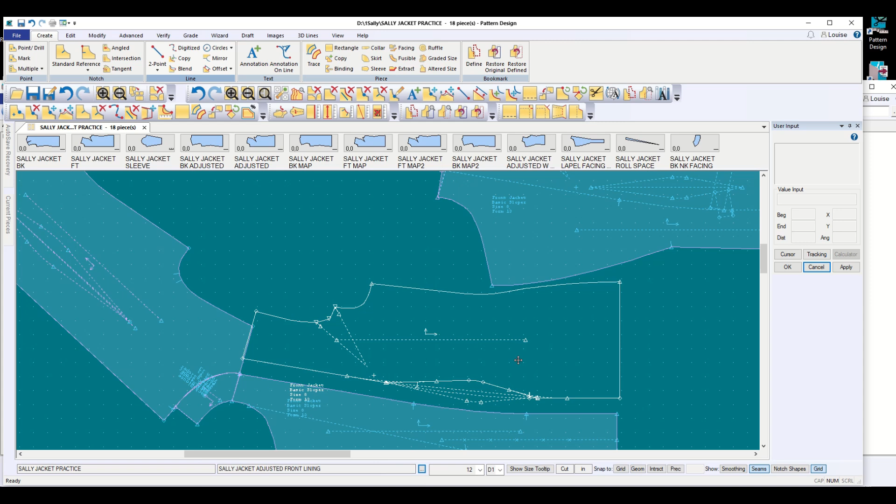So if I actually were sewing these two together, and that dart disappeared in there, and I wanted to put a pocket in here, I could even really mess with it and close that dart and leave a little bit of ease in it, and not have to sew that dart either, because I could. But it depends on where you're working, the price point, the fit, and all of that.

So you don't have to do that. Just leave your dart where it was and show it to me without converting it into the princess facing seam. But you could close that and get all of your darts gone so that this cuts all the way over to here. You could just close that dart and spread it open and have a little bit more ease there.

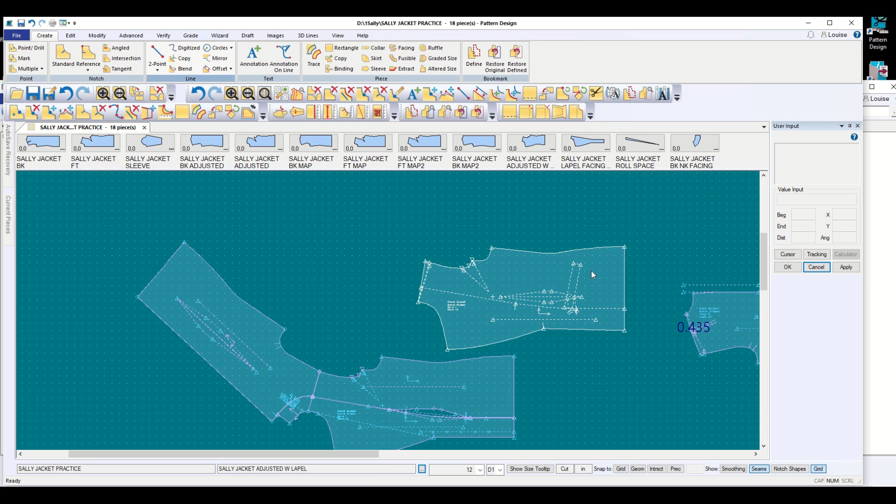But if you put a pocket opening right here, well, you don't want to put it where it's going to show from the outside. Pick a place and put in a pocket lining. I guess you could just put it right here. So if I wanted a pocket bag right here, I want it to hang straight down with gravity.

So the back side of your pocket bag is going to hang down here. And you'd want to do horizontal lines and connect them. And the front side of your pocket bag is going to be that much shorter. Then you could sew the two sides together and make a nice welt patch pocket, or whatever you decide to do with your design. But you would trace off the two pocket pieces separately, and your welt separately.

And I can hear you getting bored. I never saved the original of that piece. How sad is that?

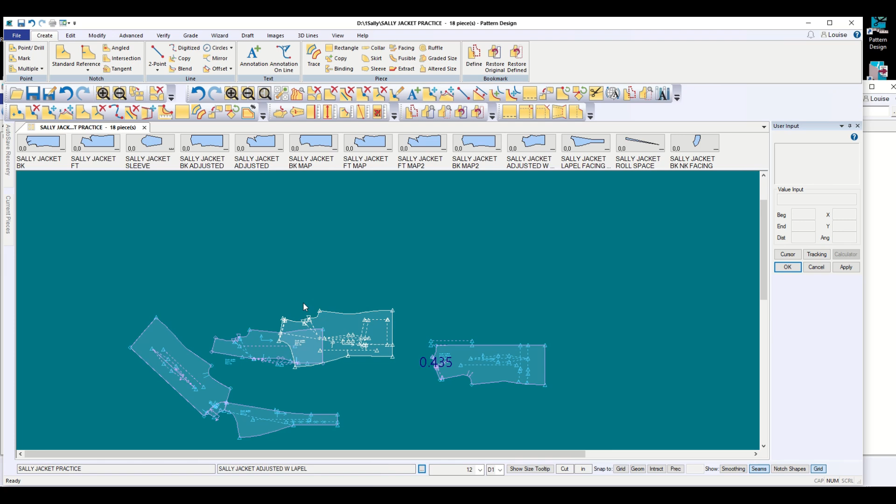Should I undo all the way back? I could. Let's try. Okay, so I'm going to save it in that position, and then I'm going to wish that I could undo all the way back and have the other piece. But this is what I'm expecting for your homework.

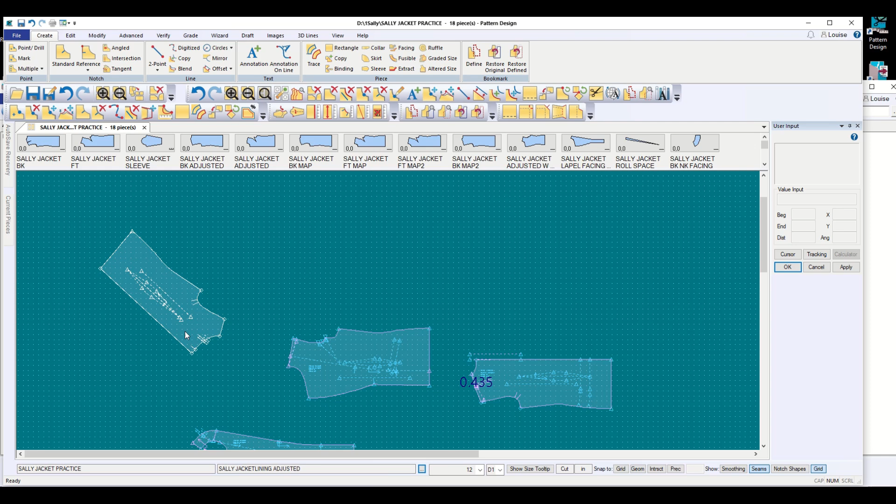Piece to menu. Piece to menu. And this one I need to save. And I've got that one and I haven't changed it. Did I want to save that piece? I guess so.

So I don't need the extra lines on this piece. Some of this, if you would like my help with, if you get confused, save it with the lines on it. You can always delete them later. What does that one come back down looking like?

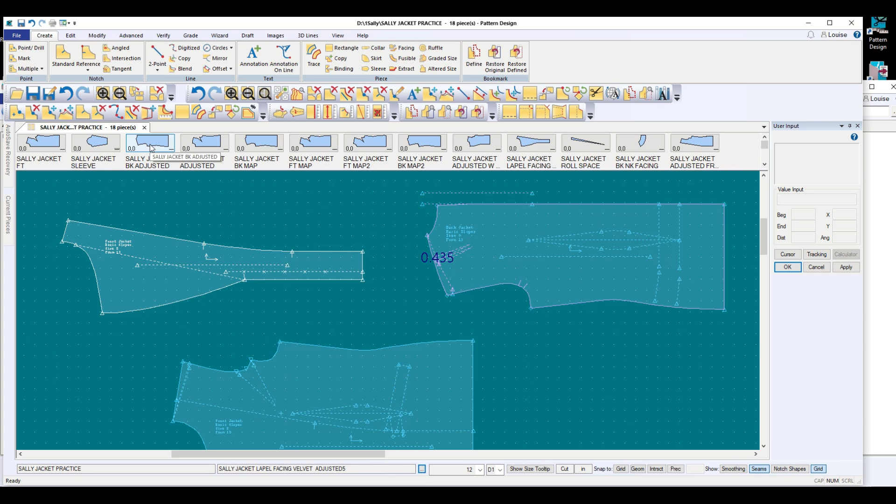So I haven't swapped that line on the armhole on that piece, and they're all over the place, so I'm going to use this, separate the pieces, and put them in a row. None of those have changed.

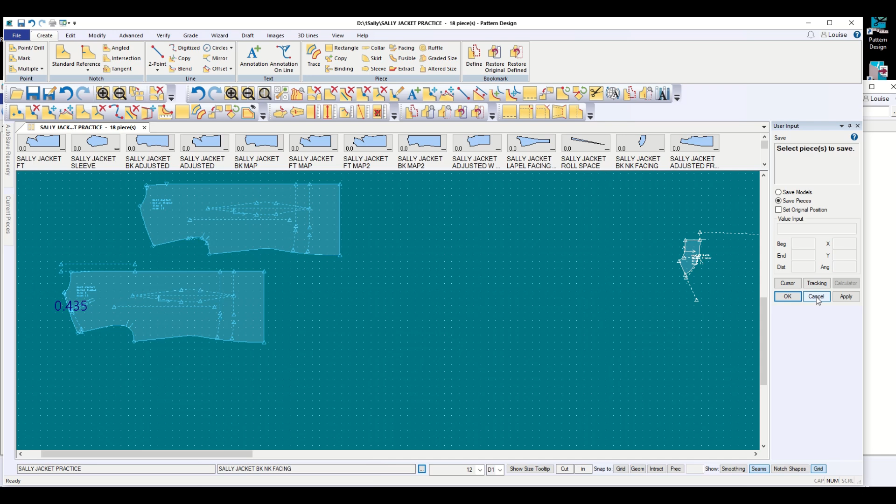I could save that if I want to ask teacher questions, because that was my thought process. This is my jacket back adjusted now, except I didn't save it with that grade rule gone and my nicer armpit, so I kind of like that one better. I'm going to save it this way. And then I can delete those extra lines.

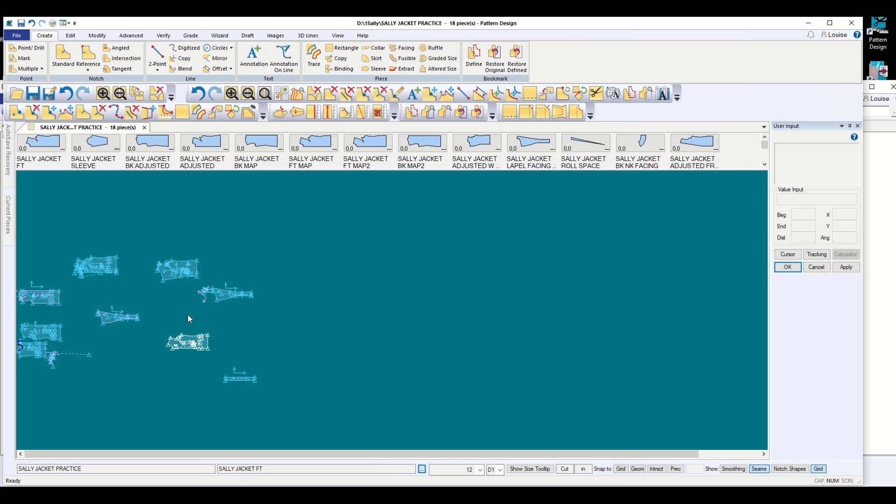And I didn't ever save over that. So when you're all finished with this, you've got your map. And the real back neck facing, if you would save them so that they're easier to see and understand, those go together.

Oh, well, look at that. I saved it that way even though the grain line is crooked. So I'm going to put it right here to take my picture with it just like this. And I'm going to use my actual front that I'm going to sew.

And you could line it up so that they're all on top of each other. And then my actual back piece I would want to put with those, and then take a screenshot of that right there. And that's what I want, well, eventually when we're all finished with this.

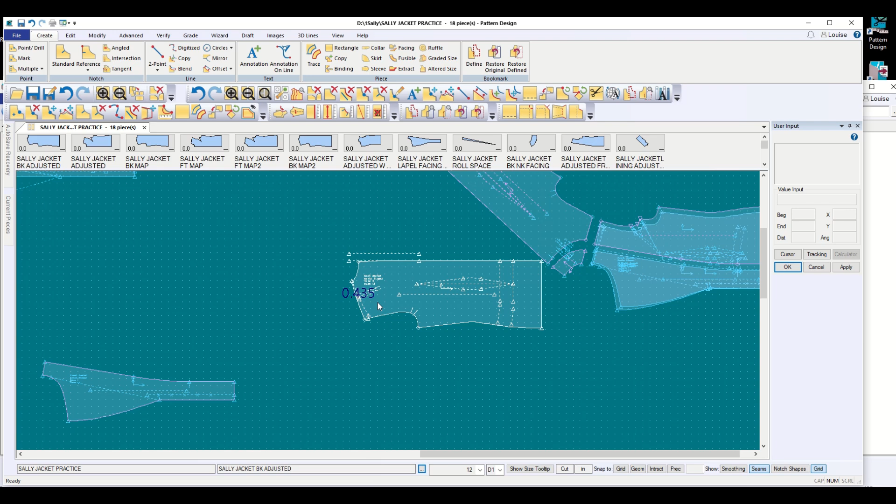But better yet, just call me over and have me look at it with you, and I'll write your points down after we've corrected it together. But that's your lining and facings, and I'll put the sleeve all together at once.